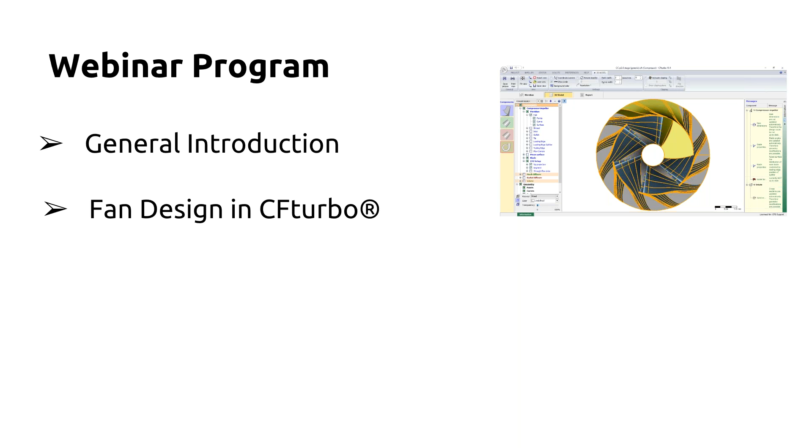There will be a live example where Oliver is going to introduce CFturbo a little bit, and then show a live example of a centrifugal fan, how it's going to be designed in CFturbo, with final export of the designed model to turbo machinery CFD. In the next part, the simulation part, Radek is going to show the turbo machinery CFD simulation and evaluation of that centrifugal fan, which was exported by Oliver from CFturbo in the previous section.

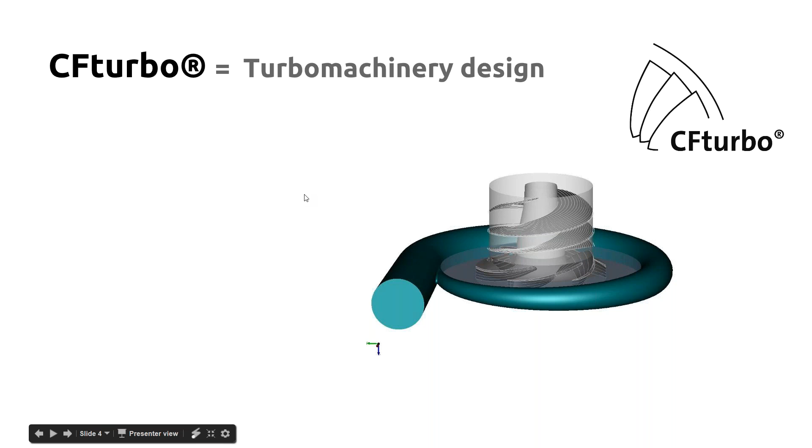CFturbo is a company based in Germany. We have two locations in Germany, one is Dresden and the other one is Munich. Our main product is the design software CFturbo. It's a modern and powerful user-friendly software tool for the conceptual design of turbo machines and its components, and it's based on latest design theory.

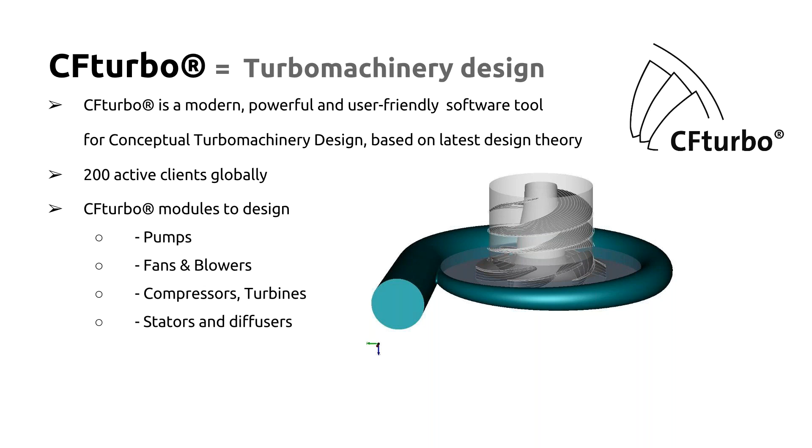Right now we have 200 active clients globally, and we see an ongoing growing process. CFturbo has different modules implemented to design pumps, ventilators which are fans and blowers, compressors, turbines, plus stators and diffusers, and of course volutes if there is a radial or centrifugal turbo machine to be designed. The industries we serve are aerospace, automotive, consumer products, energy, oil and gas, marine, mechanical and process engineering, plus the semiconductor industry.

Okay, so I think we can make you an organizer, and you can share your screen now and show the real life example in CFturbo. Yes, okay, thank you Lubos. Today I'm going to design quite a big centrifugal fan.

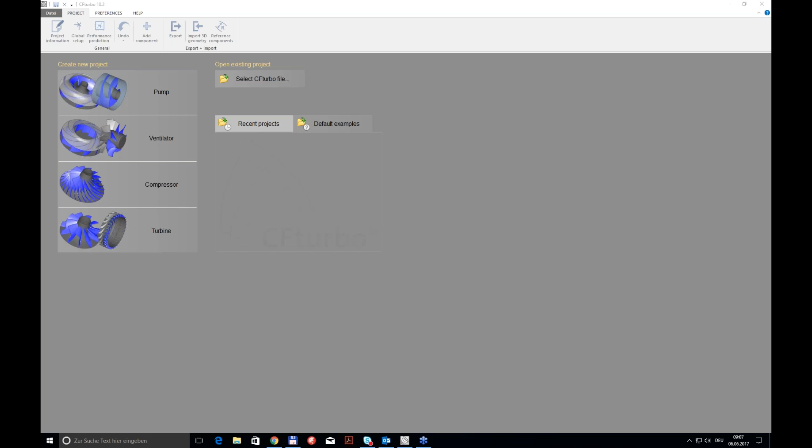As always, in case one wants to design something from scratch, it is necessary to first choose the machine to be designed, and secondly, set up or define the operating point the machine should run at most of the time, because what we are doing is a best efficiency point design.

I want to design a machine that has got a flow rate of 38,000 cubic meters per hour at a pressure difference of 0.264 bar, and it should run at roughly 3,000 RPMs. The fluid to be conveyed should be air, but this time it should be air with a higher temperature, which has a certain impact on the density.

Here, inlet conditions consisting of total pressure can be defined. It's not necessary for the design itself, but it's necessary for the setup of the following simulation in any simulation package.

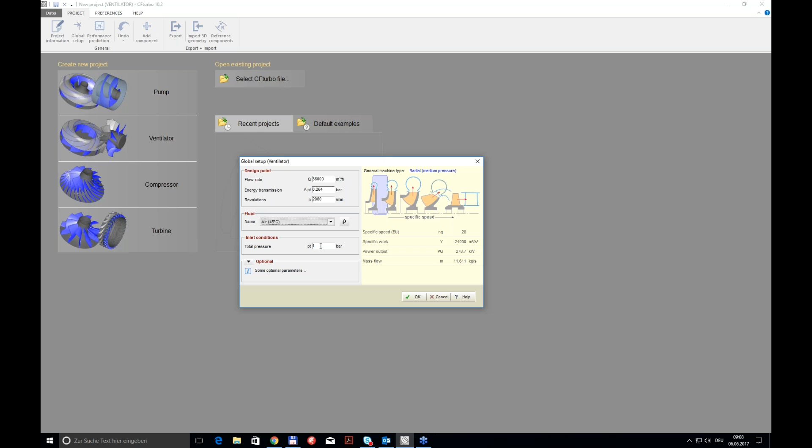Once that is done, CFturbo asks me which kind of component I want to design first, and because the impeller is the central or most important component of the stage, I'm going to start with the impeller.

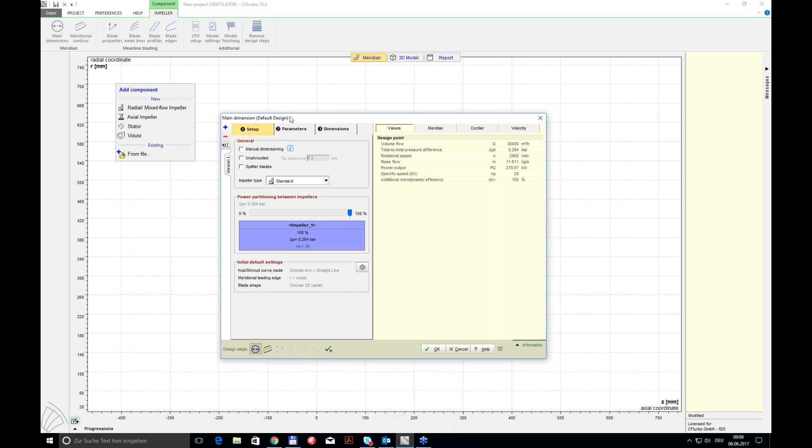The design process for the impeller always consists of a set of different design steps. The first one is the definition of the main dimensions, which just consist of inlet diameter at hub and shroud, impeller diameter, and the outlet width.

Because we call the software a conceptual design tool, the user is always guided through the design process and has got the chance to either use CFturbo proposals or do his own dimensioning.

CFturbo proposals are based on fundamental balance equations like Euler equations or continuity equations, plus empirical data that are implemented, and that can be seen and changed also by the customer.

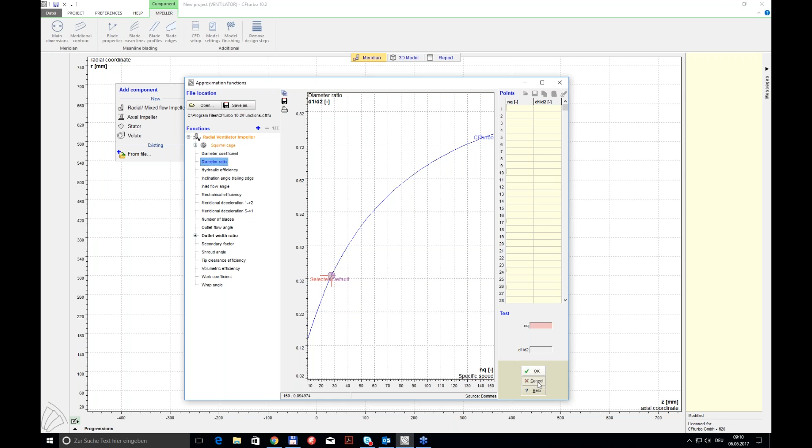So here, for instance, we have a diameter ratio given with respect to the specific speed, and the source is given. In accordance with the design point, you always get a proposal from CFturbo—for instance, the diameter ratio, which would be something like 0.325 or so. That's given for all empirical data, and the data can be overwritten by the customer and stored on his local machine so that the knowledge stays in-house.

Very important is to have an idea about the efficiencies one can get with this kind of machine. Again, they are based on empirical data and can be taken from what we call the approximation functions.

Once those data are set, either by default or by user input, one can have CFturbo calculate on that basis, plus the balance equations, these four main dimensions. I'm going to do that by just clicking on calculate, and I get these proposals.

What I want to show here is what would happen if I change a parameter. To this end, I check this automatic checkbox, which means that after any parameter change, the main dimensions will be calculated anew. So for instance, if I change the diameter coefficient, the impeller diameter must go through a change.

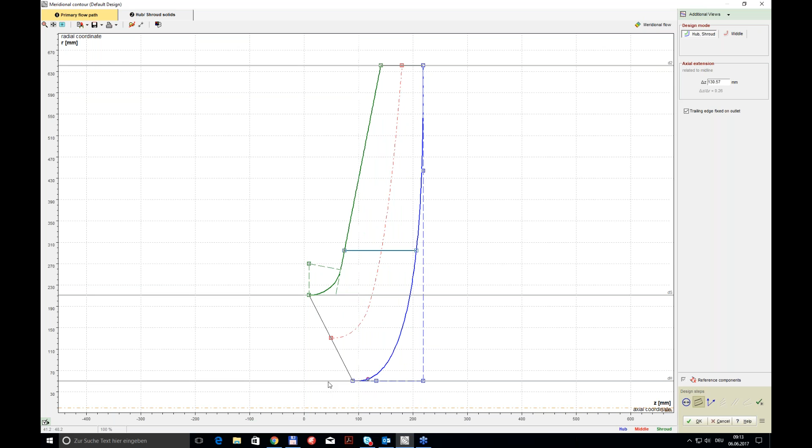The next design step is the meridional contour design, done in that second meridional contour design step. Because that's a simple centrifugal fan, the hub and shroud contours consist of lines, and at the shroud, one arc. At any time one can right-click on it and change the shape to, for instance, Bezier, which gives a lot more freedom to design the contour here.

Also, by grabbing the control points, I can change the actual extent—so maybe make that a bit bigger, or grab that arc control point here, and so on.

What I can also do is right-click on any of the control points, go into the context menu, and change the values there manually. By doing so, I get exactly the inlet conditions I want to have.

Also, what I can do is change the locations as well as the shape of the leading edge. For instance, here I want to have it still straight, but I don't want it radial, and that's why I'm changing the position of it like that.

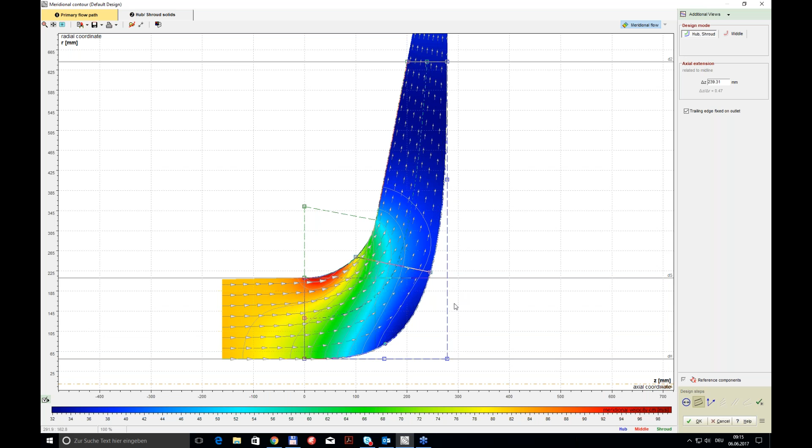Now I'm happy with that, but I want to show you the analyzing feature which is implemented. It's a potential flow solution for the meridional velocities in that meridional contour. From that you can see, for instance, that where you have small radii, you get higher acceleration, and at a hub it would be smaller, and so on.

Okay, once I have pressed OK, I can see that something has happened in the 3D model, because now we have a real 3D shape. But of course, nothing has happened so far for the design of the blades yet. To this end, I'm going to open the third design step, which we call the blade property design step.

Here, one has to define the number of blades, the general shape of the blades, because that's the centrifugal fan, and they are very often quite easily manufactured. I'm going for the circular 2D shape.

Also, one has to have an idea about the thickness of the blades, which I'm going to change to 6 millimeters here.

Because there's always a certain difference between the direction given by the blades and the actual relative flow, there is either a deviation angle to be defined, or the user should make use of the built-in deviation or slip models that are given here.

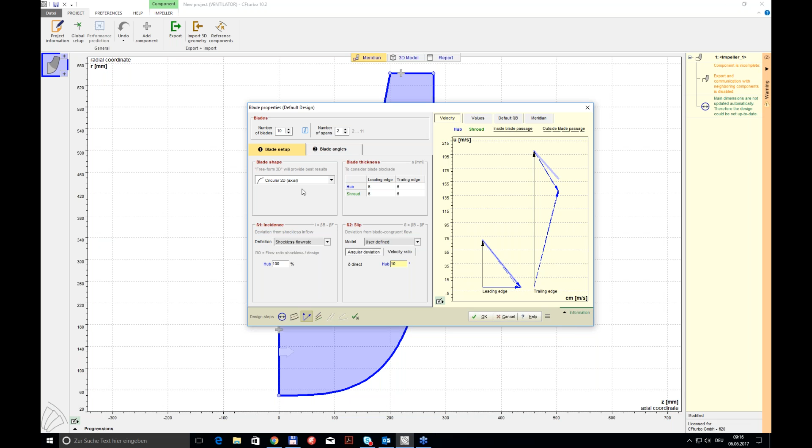Okay, I'm still sticking to 10 degrees on the hub. This time it's just defined at the hub, because with the circular shape one can only have one kind of master span, and all the others will follow the geometry of that master span in accordance to that blade shape.

The second tab holds the blade angles at leading and trailing edge. Again, they are calculated on the basis of the Euler equation plus the deviation angle plus an incidence which might be there and might be defined by the user in that incidence group.

Okay, once that is ready, there won't be any change in the 3D model, because the only thing that has been defined now are the inlet and outlet angles. The shape itself will be defined in the next design step, which we call the meanline design step.

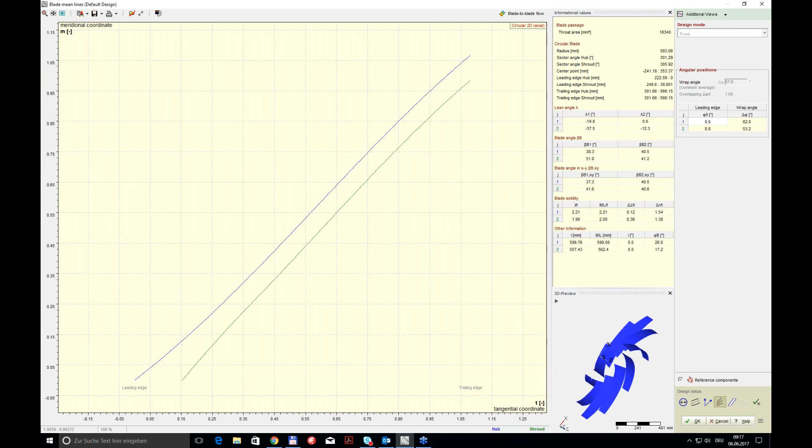As you can see here, there is just an information panel where no interaction is possible. The reason is that circular shaped blades are totally defined with the inlet and outlet angles plus the inlet and outlet diameters, and that's why nothing can be done here. But one can at least see the 3D preview and can make use again of built-in potential flow solutions to check the geometry defined so far.

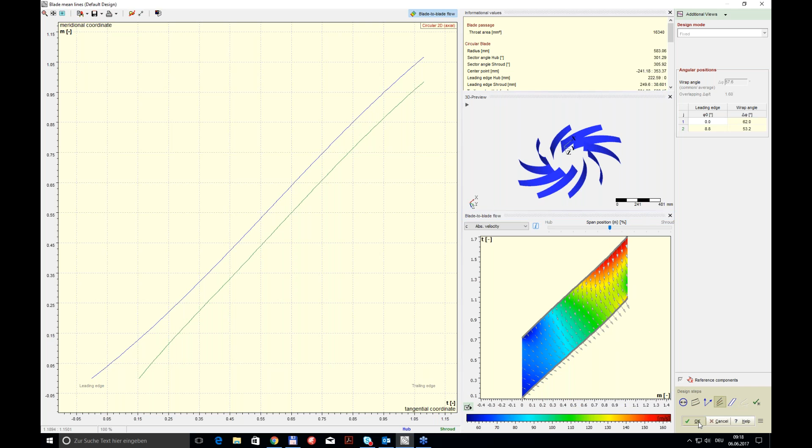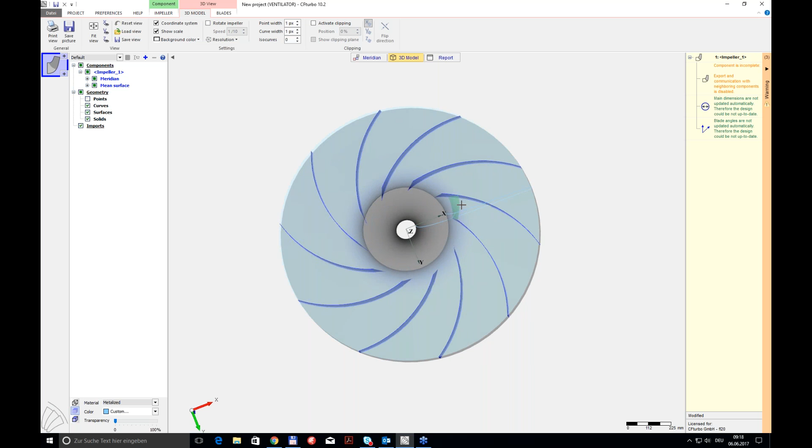Again, if I press OK and go back to the 3D model, what I can see is an impeller with blades that have a thickness of 0. Also one can see where the location of the smallest cross-section or blade-to-blade section between two adjacent blades is.

Of course, it's not ready yet, so the next design step is to put some thickness on that mean surface that has been just defined, and to this end the blade profile dialog can be used.

Here one can use the initial thickness of 6 millimeters and define a certain distribution of the thickness along the blade at hub and shroud. One can have it linearly distributed, or one can use Bézier curves again to distribute the thickness.

One even can, by right-clicking on it, load thickness distributions from a built-in profile manager, or one can also load polylines holding thickness with respect to the dimensionless length of the scale of the blades.

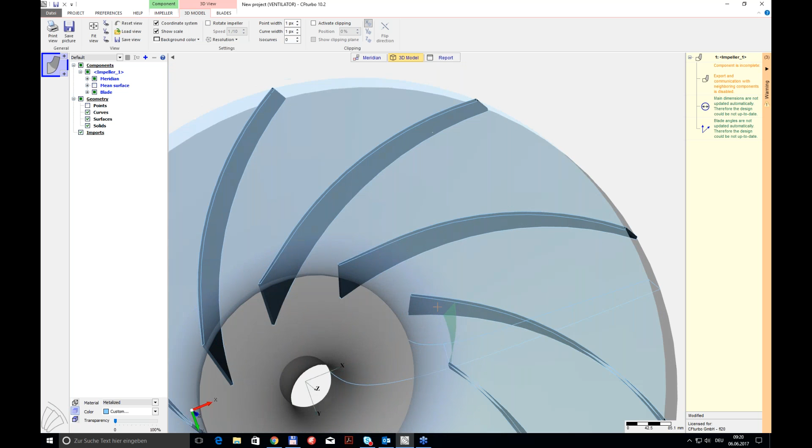Okay, but I want to stick to the simple approach with just 2 control points and a linear distribution. Once I press OK here, I can see that now there is a certain thickness applied on the mean surface, and the very last thing to finish this design of the impeller is to shape the leading and trailing edge.

Because you can see here at the trailing edge that the blade is not within the meridional contour, and also the leading edge is very sharp, the last design step gives the opportunity to shape that leading edge, for instance, with the help of an ellipse.

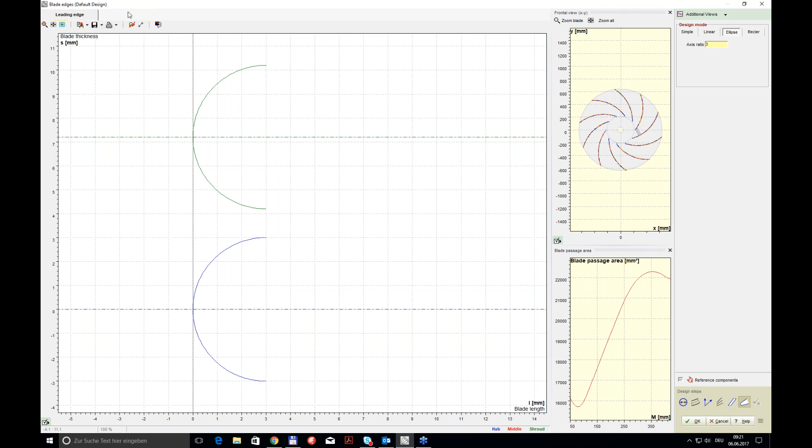Here you can give the half axis ratio of the radii, and the default is 3. If I type in 1, you see that this will be circular, but 3 will lead to a good elliptic shape.

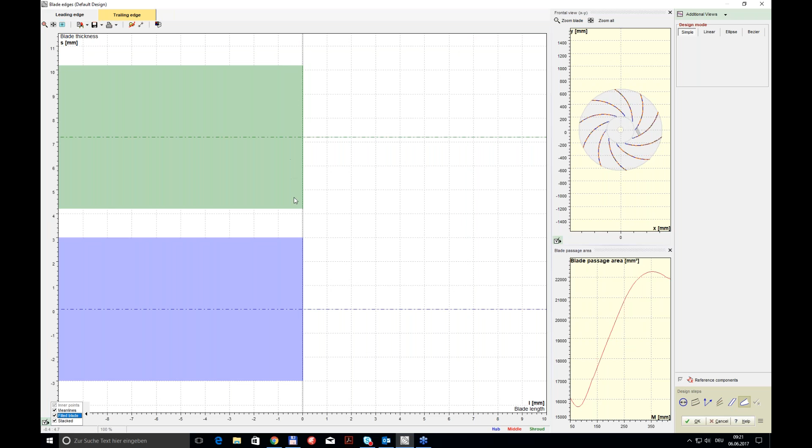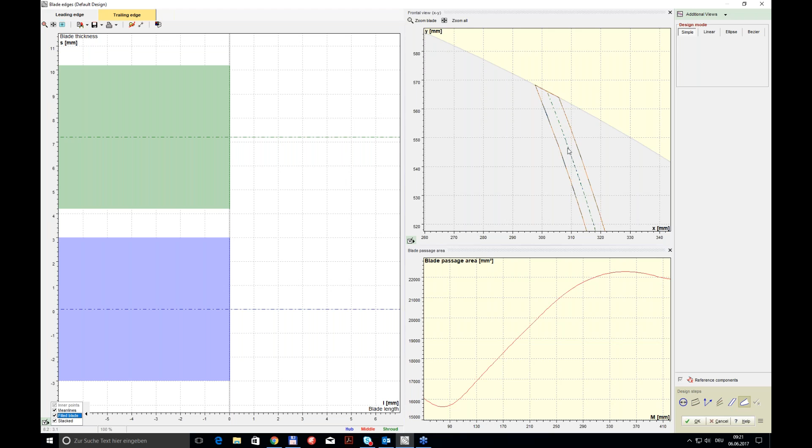On the other hand, at the trailing edge, one wants to have it trimmed with the outlet, and that's why this simple mode is applied here. You can see in that frontal view that now the trailing edge is not looking out of the meridional contour anymore.

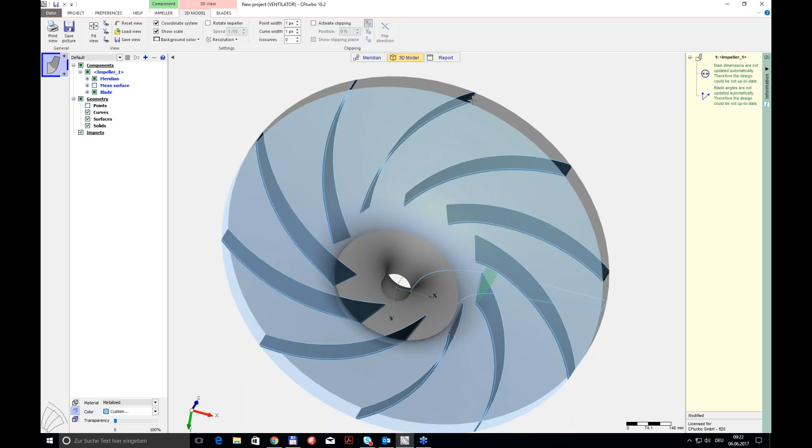Okay, now if I go to the 3D model, it's done. The only thing I want to do before I go further is add a small outlet extension, which will give some of the simulation package more freedom in the simulation process. To this end, there is an additional design step called CFD setup, where one can add this little gap at the trailing edge, and it can have a certain length, so for instance 6 mm in this case.

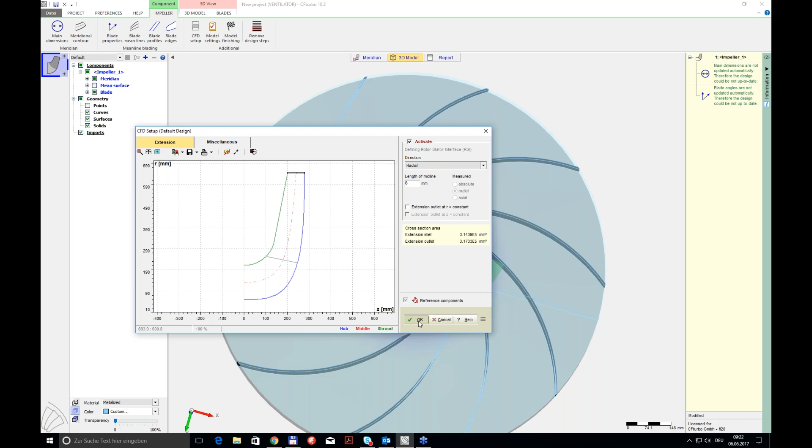And if I add this, I'm done with the impeller, and I want to save that and give it, of course, the name test, which is already there, but I'm going to overwrite it.

The next step is to add a volute at the outlet of the impeller. One can do that by clicking on the interface and telling it that there should be a volute defined there.

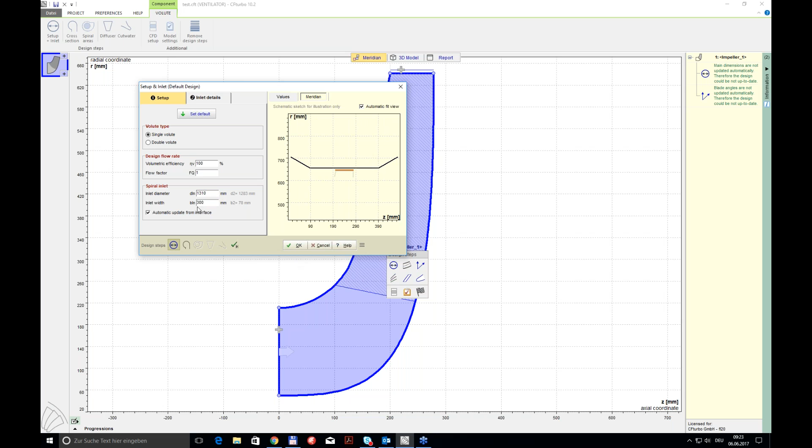Again, one starts with the inlet setup consisting of inlet diameter and inlet width. Defaults are given by CFturbo, and they can be overwritten according to the customer's wishes. So I want, for instance, to have it a bit wider than proposed by CFturbo, and maybe not at this location. That's why I'm going to increase that inlet width here quite a lot.

Next step is to define the general cross-section shape. It is done here, and because it's such a simple centrifugal fan, I will stick to the default setting of CFturbo, which is the rectangular shape. But as you can see, if I click on that combo box, there are a lot of different shapes, and there are also Bezier-like shapes or line segment shapes where you can roughly define any geometric shape you want to have.

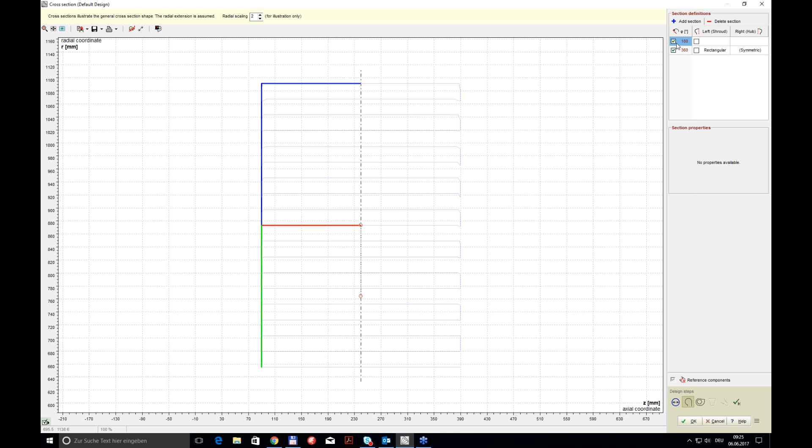Also, there is the possibility to add sections, which means with respect to the wrap angle, one can change the shape and have very elaborated shapes of the spiral. But again, it should be simple, that's why I'm choosing rectangular.

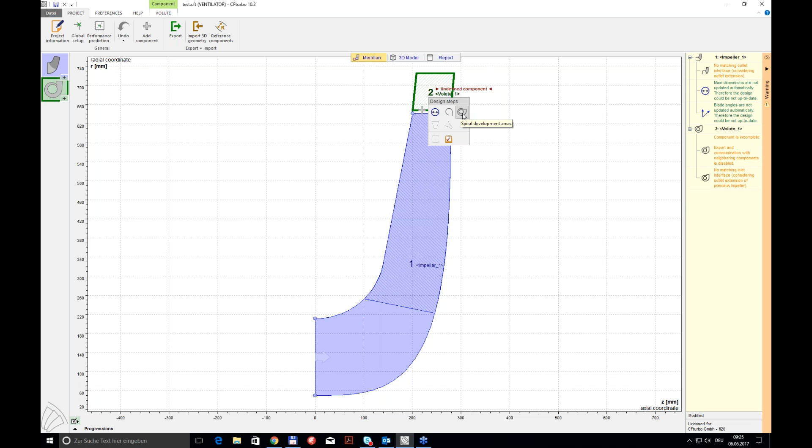Press OK. Of course, in the 3D model, nothing has changed yet because the design of the spiral will be done in the third design step. Here, the shape is scaled at any wrap angle location in accordance either to some design rules or, in what we call geometry-based, in accordance to a certain either outer radius distribution or area distribution.

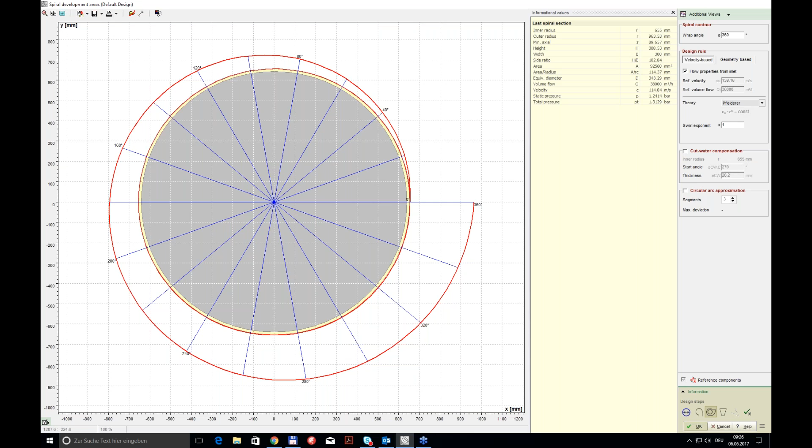So for the initial design, it's probably wise to choose a design rule, and one of them is Pfleiderer's rule. He made that swirl approach where one can choose between different swirl exponents. And if I leave everything to default, I get something like that, where my last radius is something like 655 millimeters. If I press OK and go to the 3D model, then I see now the volute.

Still missing is an outlet diffuser plus a proper cutwater. The outlet diffuser is defined in the next design step, where one can tell it how long that diffuser should be and what should be the end cross section.

The end cross section can be circular again with a certain diameter, or rectangular, which is the one that I want to go for. Because the inlet width into the spiral was 300 millimeter, I'm going to type in the width of 300 millimeter for the diffuser as well, because then one can just cut metal sheets and weld them together, and make up that ventilator stage in a very simple manufacturing process.

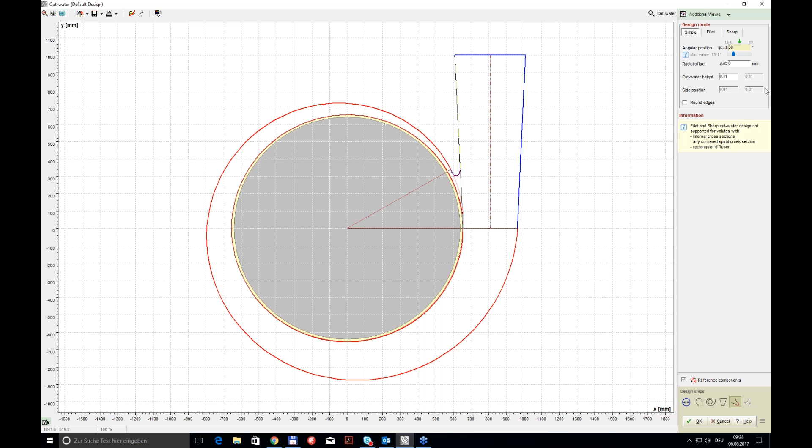Okay, and now what you see is the volute with a very sharp cutwater, and that's why the last step is to add a cutwater at a certain position here. So for instance, I can change that to 30 degrees, and again, if I press OK, you see now it's almost done.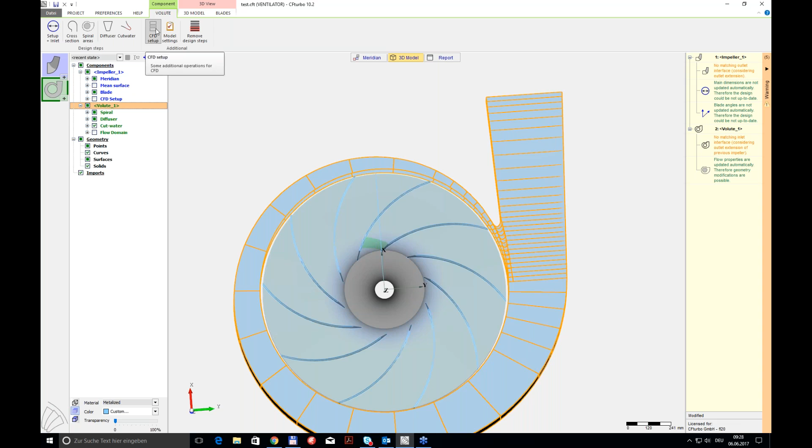I should save that again. Because we have a little gap between the impeller and the volute, for the simulation process, one has to close that gap, which is done in the Volute CFD setup. So checking the rotor-stator interface connection will yield that closing, but one can also extend the outlet diffuser by another virtual component in order to support the simulation process that might follow the design.

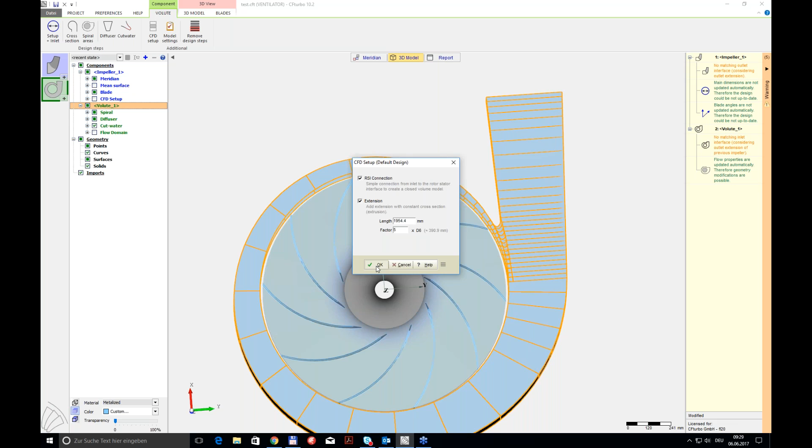Okay, so the very last step is then at the end go back to the impeller and make there what we call a model finishing with solid trimming. Here we use the built-in CAD kernel in order to extend all surfaces and get very nice intersection of it, and by doing so producing very nice watertight solids that can be used in the 3D export steps.

As well as for simulations and so on. Okay, once I have done that, the last step before I give the ball to Radek is to show the export panel, because there are a lot of... oh, that was missing. There are a lot of... that doesn't matter.

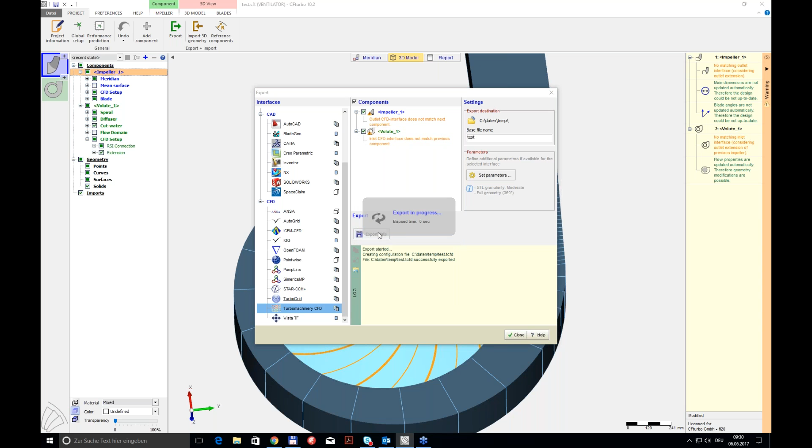Interfaces implemented. One is the turbo machinery CFD interface. Once that is chosen, I have to choose which component has to be incorporated in the design in the export process, and also what are the triangulation parameters for the STL triangulation.

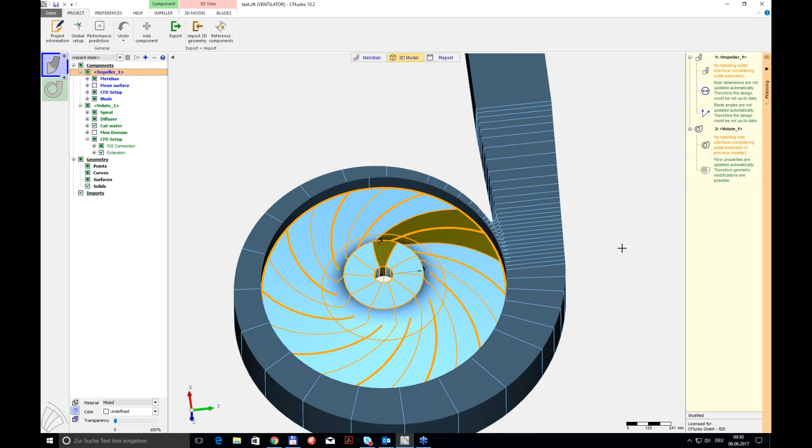And once that is done, I can start the export process. All the necessary data are written, especially the TCFD file, which holds all the data necessary to set up the simulation process in TCFD. Okay, and saying that, I'm finished, and I would ask to take over and carry on.

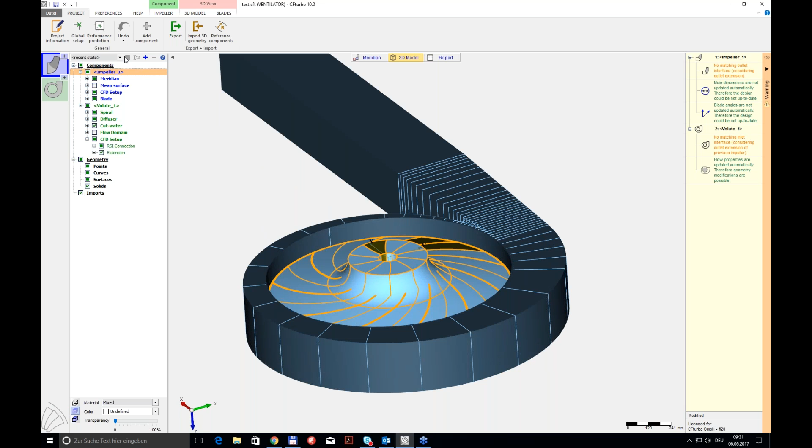Okay, thank you, Oliver, for the turbomachinery design part. It was very impressive as usual. It took, yeah, I'm always impressed because it took you like 20 minutes to design a centrifugal fan from scratch. And yeah, let's move in the presentation.

So I'm gonna take back the presentation, and yeah, it's time to switch to the turbomachinery CFD part of this webinar.

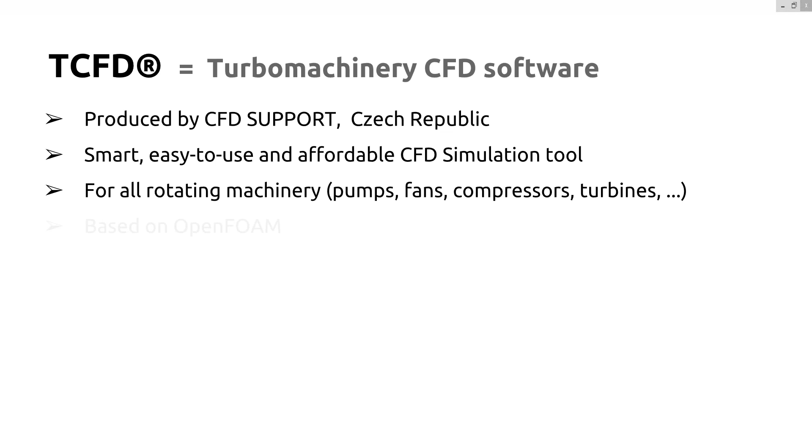I'm gonna continue with a brief description of what turbomachinery CFD is. Turbomachinery CFD is a unique software developed by Czech company CFD Support. It's smart and easy to use CFD software. Turbomachinery CFD was designed for CFD simulations of all rotating machinery, such as fans, pumps, compressors, turbines, turbochargers, hydro turbines - all of them, both radial and axial machines, both compressible and incompressible fluid flows.

Turbomachinery CFD is based on OpenFOAM, and we believe turbomachinery CFD is unique for at least four reasons. So I will quickly go over them. First, it has no licensing policy, which means our clients can keep turbomachinery CFD forever, and they can use it for unlimited number of users, jobs, or cores. We have a different business model than standard CFD codes.

With turbomachinery CFD, what is paid for is the first delivery and later technical support and software maintenance. This gives the investment in turbomachinery CFD a permanent value, and also this means our clients can scale their CFD simulations in a really big way.

Number two would be turbomachinery CFD is fully automated, which means all the workflow from the initial data to the final engineering results can be run by a single command or a single click in the graphical interface. And all the process is being done automatically. For this reason, turbomachinery CFD is also extremely effective.

Number three would be we deliver extensive technical support with turbomachinery CFD. We keep a custom approach to every customer, to every issue. We never leave behind any of our clients. We are very flexible in it. Turbomachinery CFD technical support is unlimited. We support our clients even in matters out of the turbomachinery field, for example numerical mathematics, physics, CFD, IT, or even software engineering.

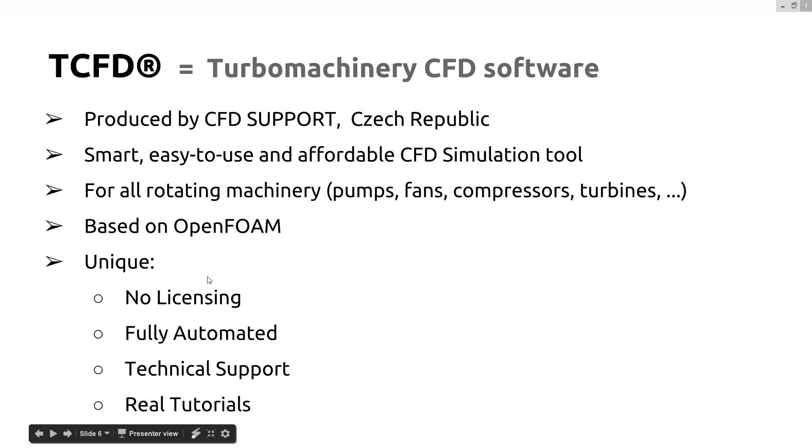There are many other benefits of using turbomachinery CFD. I'm not going to go over all of them. I'll finish here with my last point: at CFD Support, we believe the future of CFD is automation. In CFD, everything can be automated. The automation is extremely effective, even more effective than we expected in the first place. So nowadays at CFD Support, we think only in an automated sense, and this brings a huge value to our users.

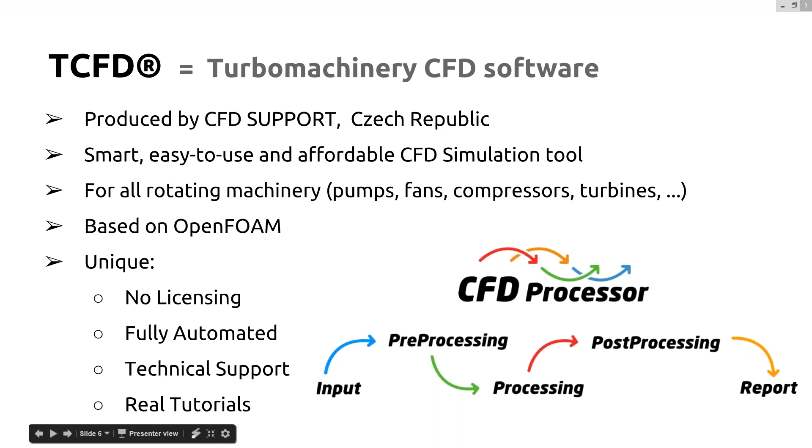I think it's time to switch to Radek's part, which is a live example of turbomachinery CFD simulation of that fan, exactly that fan that Oliver designed in CFturbo. So Radek, are you ready for your part?

Yes, I am. Please, can you give me the presentation? Okay, I think it's okay. Let me show my screen now. You can go ahead, I believe you can see my screen. Yes, we can. Okay, perfect. So good afternoon.

I will start directly because Lubos has already said all important information, so I will jump directly into the practice. I have about 15 minutes to show you how easy it is to use turbomachinery CFD. I prefer to introduce you to the basic principles rather than show you the very details in CFD setup. So I will really show you the basics, and we are going to use the export from CFturbo.

This makes the workflow even simpler. As you will see in a few moments, with CFturbo and TCFD, we are now able to run a CFD simulation and get significant results with just a few mouse clicks.

So let's start. We simply start from the data which Oliver has just generated. At the beginning, you need just the STL files, which define your geometry, and the configuration file, which is automatically generated from CFturbo. This basically defines all necessary parameters which allow us to run the simulation directly without any modification. It sets the fluid properties, simulation properties, defines the geometry, and so on.

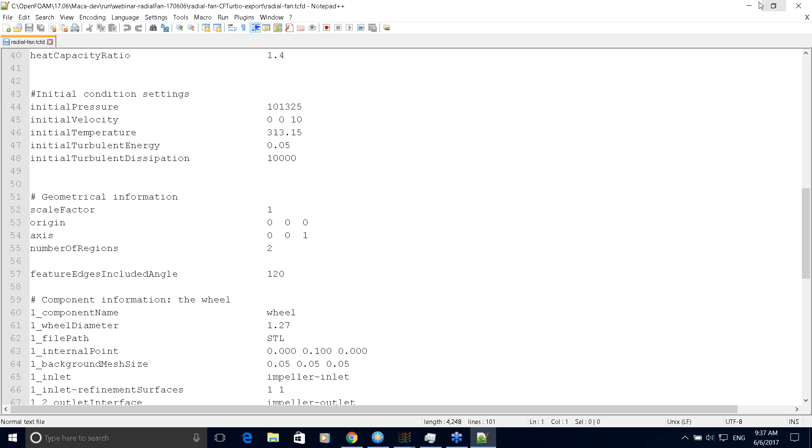To start working, we need just to click on the configuration file, or if we started from scratch, we can click on this icon on the desktop. So I will click on this radial fan configuration file, and the new ParaView session will appear directly.

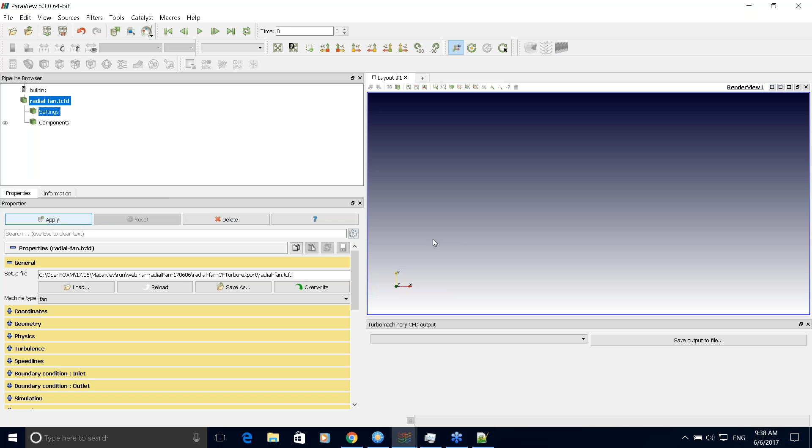I am using a brand new version of our turbomachinery CFD, which is going to be released next week. To start using it, I just click on the apply button, and in a few seconds the input geometry will appear.

This is the geometry which Oliver generated. This is a standard layout. Here you can see the geometry, and here you will see the log screen or log window, showing the actual processes which are running. Here is the pipeline browser, so we can add other filters to work with TCFD. An important part is these menus, which contain the setup of all necessary parameters.

So everything is preset. I will go through this very quickly. Here in general, you can load, save, or overwrite the configuration file. You should set the machine type which you would like to simulate. This defines the coordinate system of the rotation.

In this geometry, there are some parameters, for example, to scale the geometry, and the physics setup, so the setup of the fluid. Of course, you can also set the turbulence model.

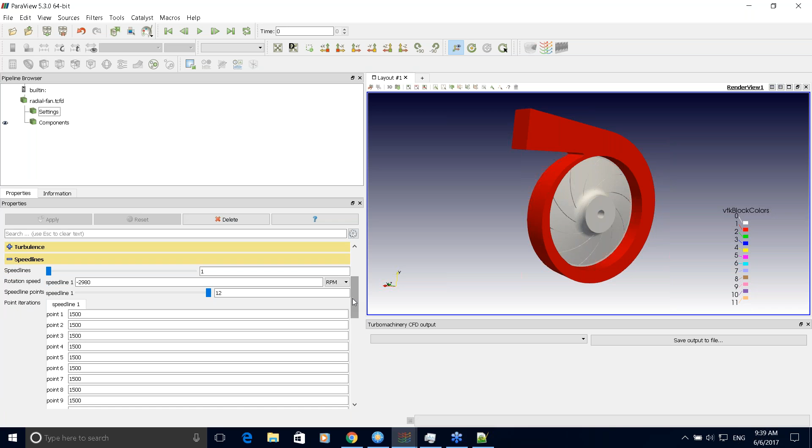Here in the speed lines menu, you can define more points, which I actually modified, because from CFturbo you get one point to simulate, which should correspond to the best efficiency point. But for validation or for generating efficiency maps, you can add more points to be simulated, or even add more speed lines with different rotation speeds.

The next menu is simulation, an important menu here. Basically the most important parameter is processors, so you can run the simulation using any number of processors, usually the number which your hardware provides. There is no limitation, no licensing policy, so you can use a very high number of processors.

Other advanced parameters let you set numerical parameters like relaxation and so on. Here are the initial conditions for the simulation. An important part is the components part.

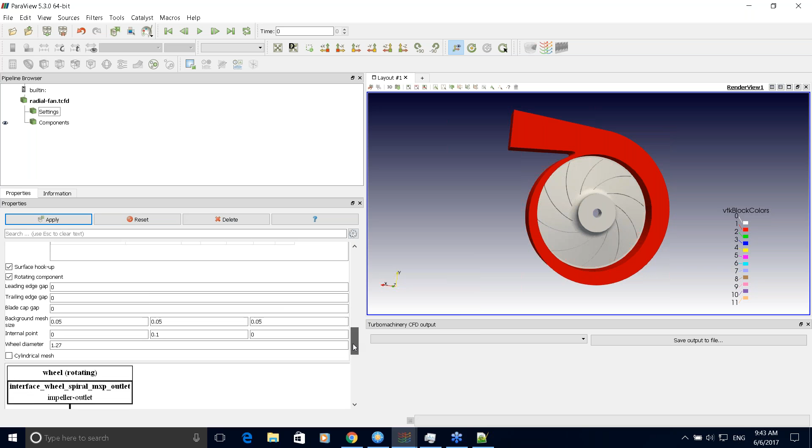Here are other parameters to set. If you define the geometry from STL, you should define the fineness of the mesh. Again, it is set to default, but you can modify it. For example, an important parameter is the background mesh size, which is the largest cell in the computational mesh, and there are more parameters to be set.

Here is the topology graph, which is really nice during the setup part. If you are setting your geometry from scratch, it is really nice because you see the actual topology, which part is connected to which, which part is rotating, and so on.

So there are other parameters for the meshing. The meshing tool is actually the snappy hex mesh.

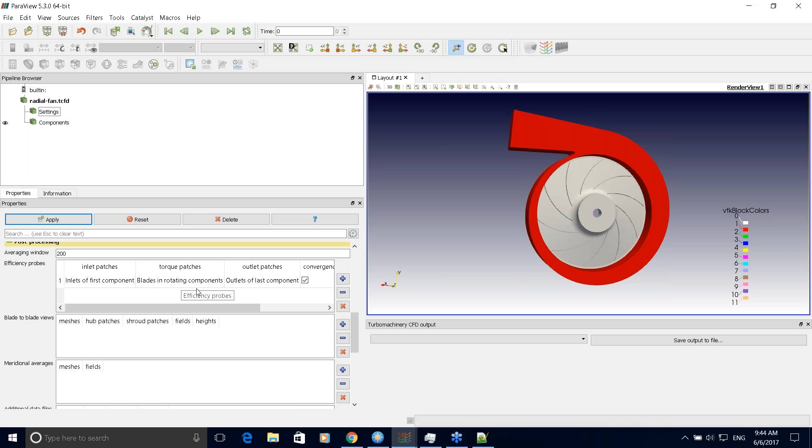The last two menus: first, post-processing. This is a new feature. Here you can define which parts will be used to evaluate efficiencies, pressure drops, and so on. The default is inlet to the geometry and outlet from the geometry.

Blade-to-blade views: you can define the blade-to-blade views, which will be automatically generated. Basically, you should define which component to evaluate. The default is the rotating component, and you can set which field you would like to visualize and at which radial height between the hub and shroud.

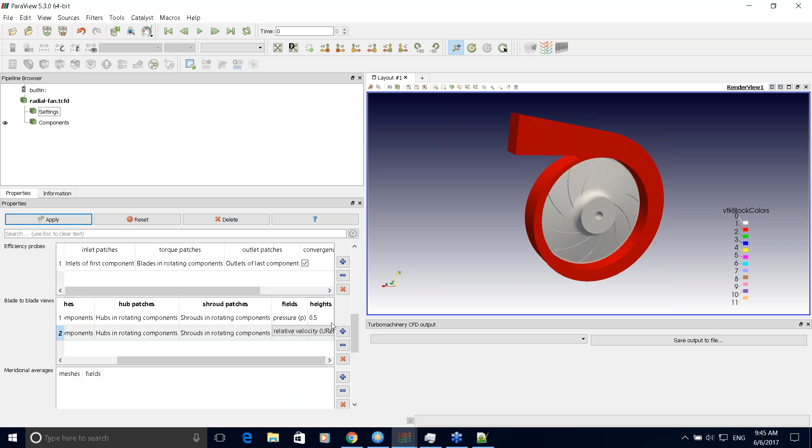I will, for example, add pressure, static pressure, or for example relative velocity with LIC, which is the streamline filter, and so on. Of course, you can add more heights and more fields to evaluate.

Meridional average: again, you can add the meridional average filter, and again you get automatically a nice visualization at the end of the computation. You can set, for example, total pressure to evaluate, and other fields.

A really nice feature is to add some old graph to compare with the new results. So you can add some old data. I have here some old graph, and I can add it because I know that these columns define efficiency and mass flow rates, flow rate versus efficiency. So I would like to add old data to this graph.

The last one is the scripting, so you can add your own user-defined functions to set something which is not available implicitly in these menus. Whenever you are satisfied with the setup, you should approve it by clicking on this apply button.

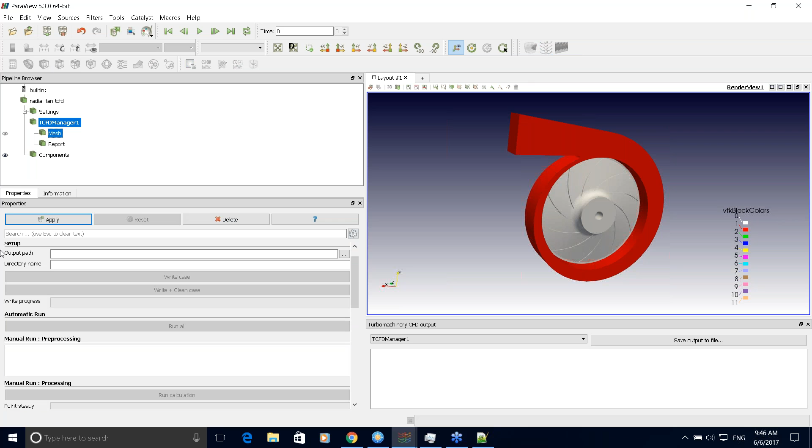Now the setup process is done, and afterwards we will apply this TCFD manager, using which we can manage all steps of the simulation. At the beginning, we can define the name of the directory in which everything will be stored. Again, I need to click on apply button to approve my changes.

Then the first step is to write the case. Now the TCFD processor is writing all necessary files, directories, and other stuff to run the simulation properly. Here in the log file, you can see what is happening right now.

For the first step, you have two options: you can run all by one click, or you can do everything step by step, first meshing the geometry, then running the calculation, and then generating the report. So first I will click, for example, on mesh all.

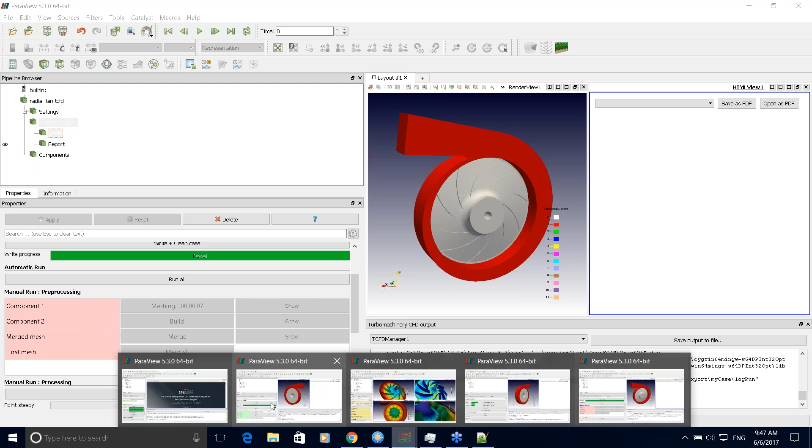Now the meshing process is running, creating the mesh. If I jump a little bit, we are now at the step where the mesh is generated successfully. You can visualize it by clicking this show button, and here we can make the mesh visible by clicking on this eye icon, and invisible for other components. Now we can check the mesh, for example.

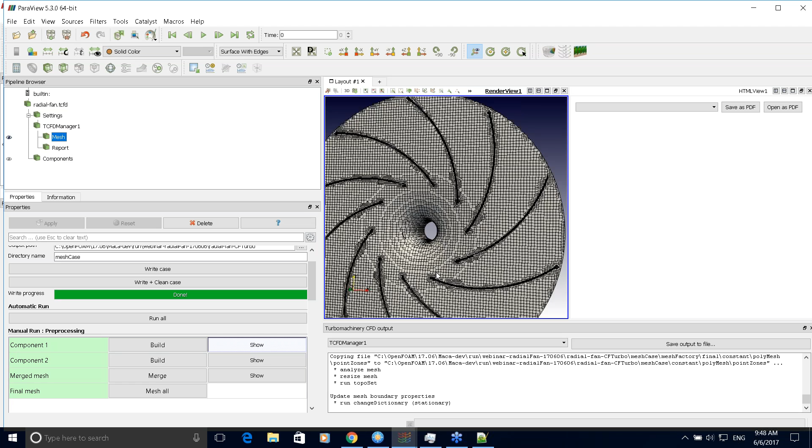When we are satisfied, we can run the calculation just by clicking on this button, run calculation. You can see the process of the calculation.

I will jump here because I've run the simulation before the webinar started. So now we can see that point 2 is simulated. You have information about the time left for the whole computation, because I set 12 points to be simulated. Anytime you can, for example, skip to the next point.

And what is important, anytime you can generate the report. There are two buttons, which is also a new feature. You can generate the light report, which will show you the actual data of the simulation, and is generated very quickly. So when I'm clicking on it...

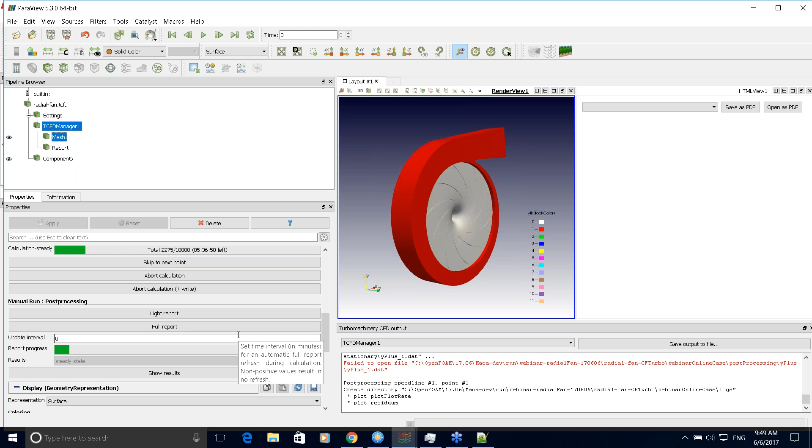Now the light report is generated, and when it is generated, it will appear automatically in this right window. And when the mesh or the computation is finished, then we can click on full report to see the full report.

So for example, here we have the light report, which shows basic information and important convergence of flow rate, residuals, and for example fan characteristic and efficiency. Because we have only 1 point, but we can see that the first point has 83% efficiency.

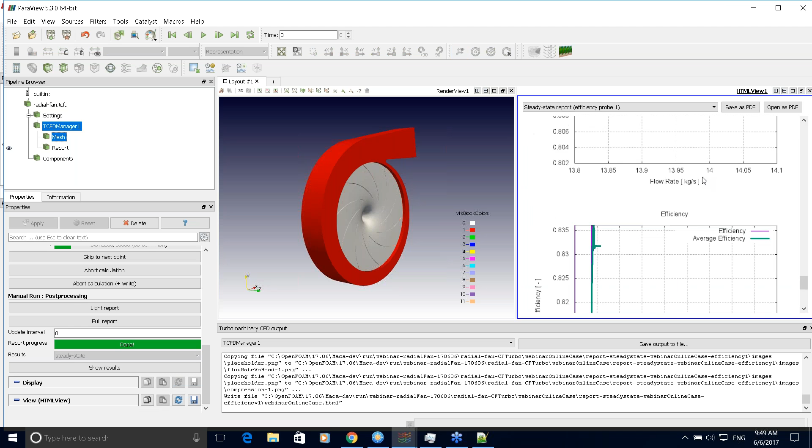At the end of the computation, which I have here, we can see all is done, and I can generate the full report, which takes more time. Now I would like to briefly go through this report.

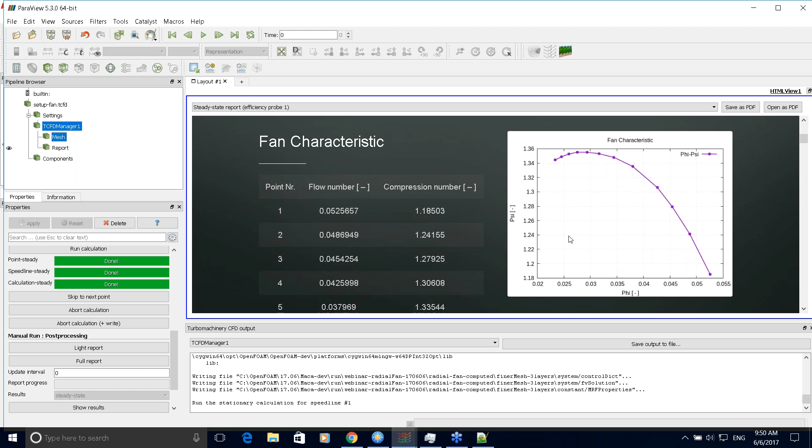You can see basic information about the simulation, for example Y+, about the mesh, wall clock time, so the overall time of the simulation, and fan characteristic, which is the graph showing the numbers psi versus phi.

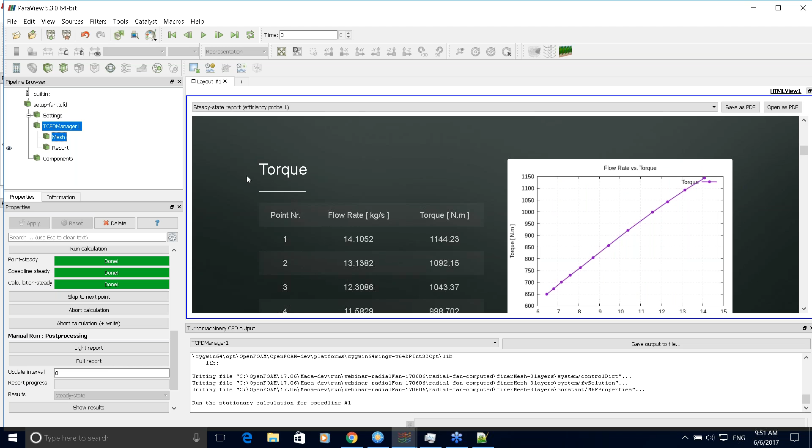And the report contains other variables, for example torque, total pressure difference. Always you can see the graphs and the numbers in a table for each point, and so on.

There are a lot of variables, for example total temperature. The next one is velocity magnitude per interfaces, and so on. And what I would like to show you is the blade-to-blade view, which I have defined.

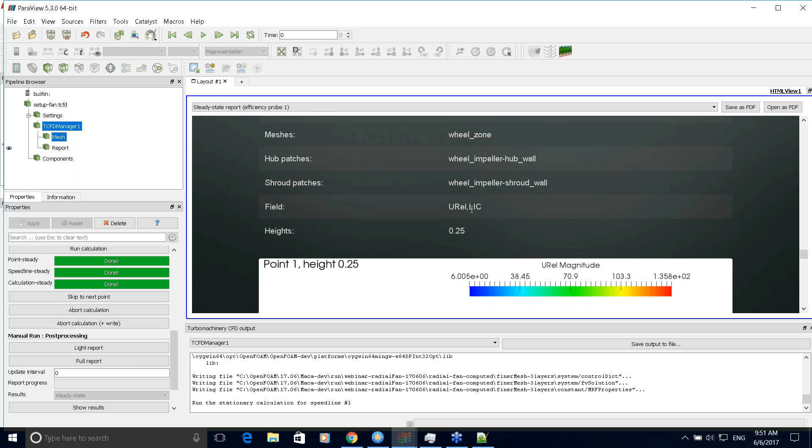And here we have plotted relative velocity with LIC filter, which is the streamline filter. Again, you can nicely see, for example, I guess 0.4 has the best efficiency, and you can see that the points with lower efficiency have more recirculation between the blades.

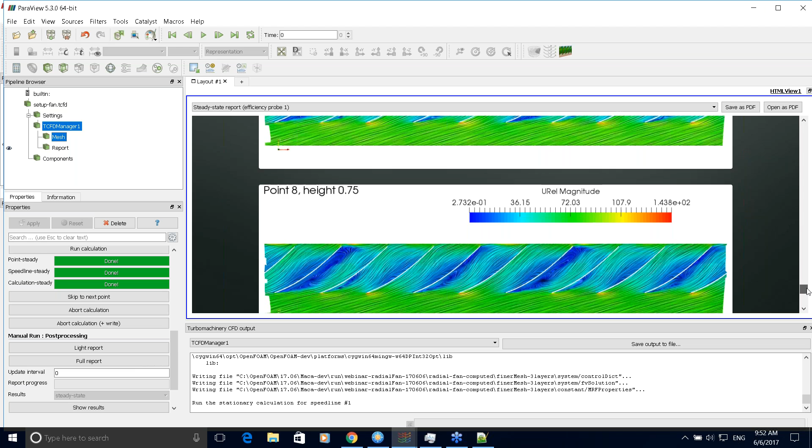So you can nicely analyze the results. And the last one was meridional average, so you can see the meridional average. For example, here we can see the total pressure.

So this was the automatic evaluation, but you can also do your own visualization. For example, I prepared here. You can visualize just any part of the geometry with, for example, this total pressure distribution.

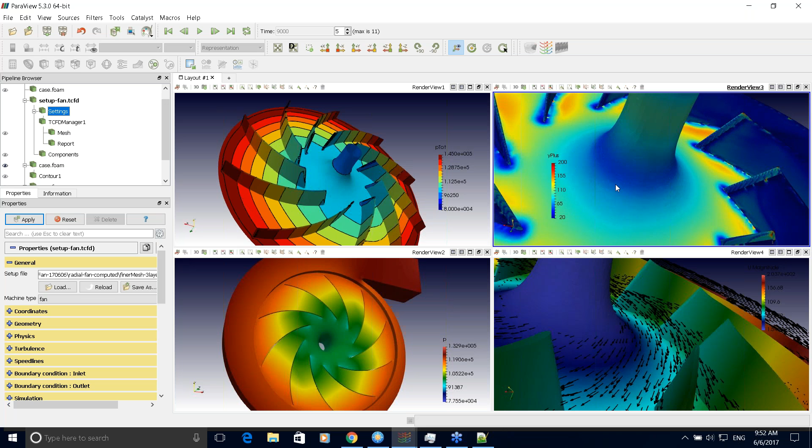You can visualize the whole geometry, for example, with static pressure distribution. You can visualize Y+ if you are really interested in the turbulence model, so you can nicely see in which part you have Y+ in the correct range, and a lot of other filters you can apply on your geometry.

Okay, I think my time is almost up, so I will just summarize. As you have seen, TCFD is a great, easy to use and powerful tool for detailed evaluation and validation of your geometries. So basically in CFturbo you can design your machine, and then by a few clicks, even without deep knowledge of CFD, you are able to validate your geometry.

And on the other hand, TCFD can be scripted and therefore easily incorporated into your current CFD workflow, for example. So using CFD for turbomachinery evaluation has never been easier.

So my time is up, I have to hand back the presentation to Luboš. No, it's okay, just take your time. Yeah, no, really, I'm finished. Thank you, okay. Okay, nice, thanks, thank you Radek. You're welcome. So is it back on me? I guess it is, okay. So yeah, thank you Radek for your live demo.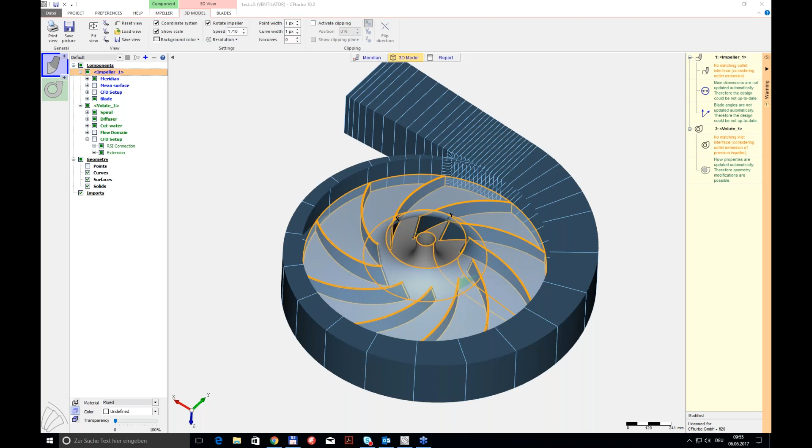Yeah, we can see CFturbo now, so I will read another question. Question to Oliver: how to address air with dust particles at elevated temperature, like flue gas delivery? In the design process—

Oliver, we can't hear you now. At least I can't hear you. Okay, so it seems we have lost the connection with Oliver.

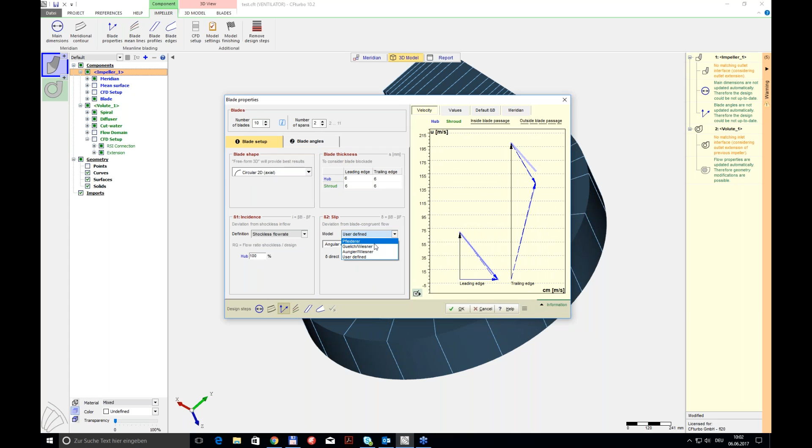No, you don't need to calculate it on your own. There are these modules implemented, and once they've been chosen, they will be considered in the design process. Everything, especially the calculation of the slip or deviation angle, is then done by CFturbo.

So if I switch to the Gülich-Wiesner model and click calculate, the deviation angle is calculated as 28 degrees according to the impeller diameter, design point, and of course the slip model given here. So everything is always proposed by CFturbo, but one can override it and adjust things according to their own needs.

Okay, thanks. The next question on CFturbo is: would you expect this impeller design to meet the required duty point on the first attempt?

If it was like that we wouldn't need CFD. It depends very much on the design point and the machine you want to design. Sometimes it's quite close - we have customers that don't use simulation techniques at all, but most customers need a couple of loops or iterations before they reach the design they want. But because everything is parameterized and the interfaces are there, it can be done quite quickly in a decent time scale.

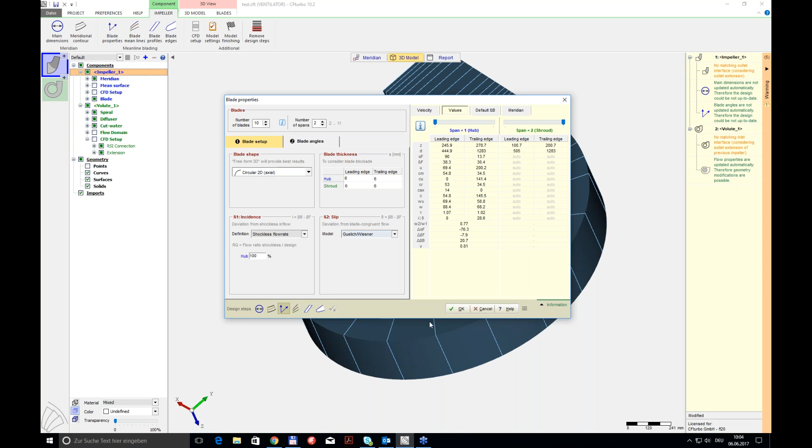Yes, it is. If I go back to our export panel, one can see there are a lot of interfaces implemented. We have general geometry formats, which are text or XML data. Then neutral 3D geometric formats - STEP, IGES, STL, BREP. We could even export, well, not very high quality, a tetrahedral volume mesh if we want. Then we have interfaces to CAD packages, and a big deal of CFD packages that might be used on the customer side.

And everything can be scripted and used in a batch run, which means one could also incorporate CFturbo in an automatic optimization workflow. Optimization is very popular, a huge trend in CAE in recent years. So yeah, very useful. Okay, the next question.

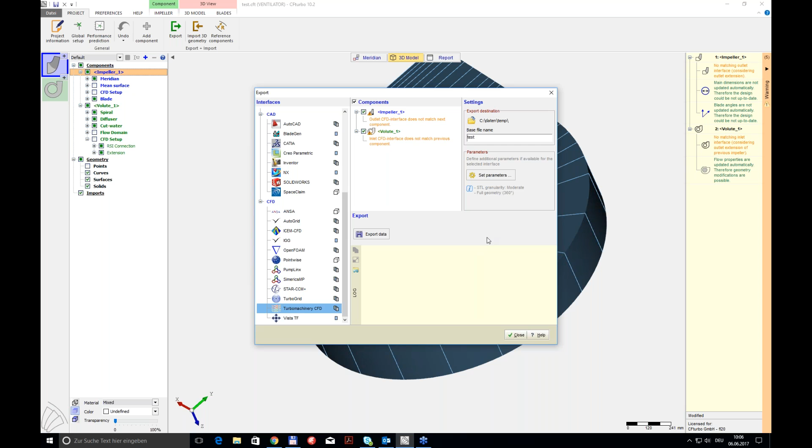Does CFturbo predict the required power? It does - we have implemented a performance prediction. Let me get rid of some additional curves. Underneath the values we have here is also what we call the required power, and that can be estimated here. But of course the accuracy of that implemented model is very poor compared to CFD simulations.

That's why we always have this warning here, because it just depends on a couple of geometric parameters and a couple of empirical coefficients. I would always recommend going into CFD and validating the power and performance of the machine there, rather than using that simple performance prediction.

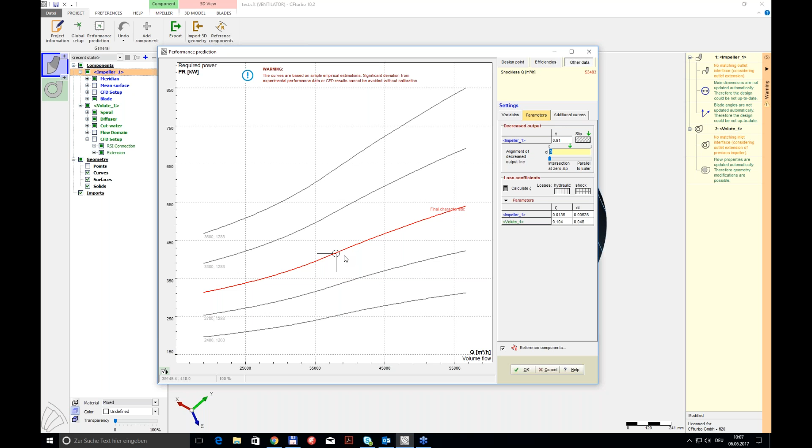Okay, thanks. The next question: how many types of volute does the software support? Not the sectional shape, but the classification - internal, external, or center type. The internal one is famous for its extreme compact size but prone to lose total pressure along the volute, from Bhargav. So, would you, Oliver?

Right, yes. All the available shapes are given here, and it's not only the shape that can be chosen but also whether it's external or internal. For instance, what we call the round internal one would be the one probably asked about, and that would yield a very compact design but with the disadvantages mentioned in the question. They're all given here and can be found here. Probably the most important thing is that with the round internal type, you get a very small outer diameter.

Okay, and perhaps the last question on CFturbo: I noticed you changed the meridional contour in CFturbo from the default. Is this to improve the efficiency of the impeller or to meet space requirements? Are you looking for a constant velocity across the contour?

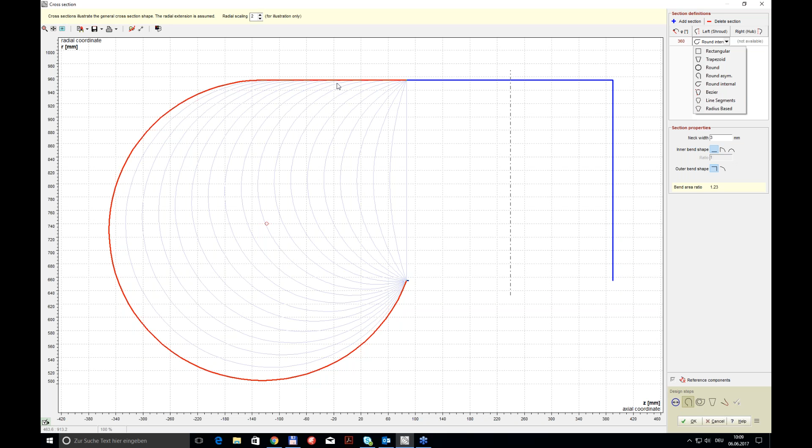Okay, yeah, I think this is it for now, and I will switch to Radek. So are you ready? There's a question: how about using LES or DES turbulence model in TCFD, from Jan?

Yes, it can be done, not implicitly, because at this version we provide just K-omega SST, K-epsilon, and laminar turbulence models, but we also provide transient simulations. The video you saw before the webinar started was generated using TCFD with the DES turbulence model. I created a simple script which can change the turbulence model and set it for DES modeling.

So it's not available implicitly, but it can be simply modified using the scripting menu. So basically it is available, and we can provide a script without doubt. It can be simulated in TCFD with either LES or DES - basically any turbulence model available in OpenFOAM.

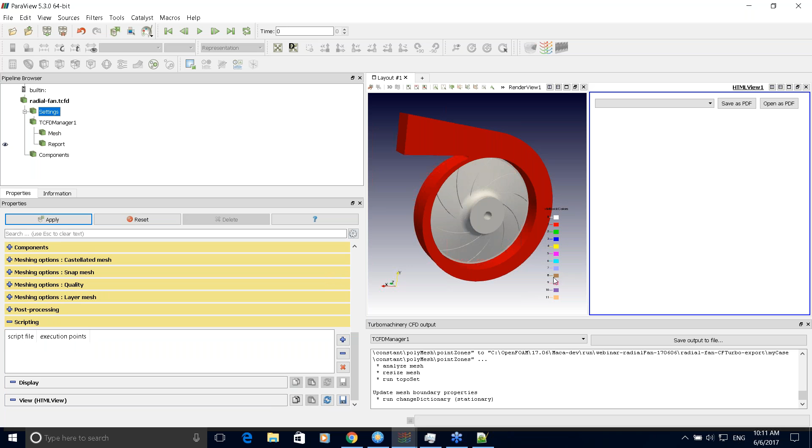Well, thank you Radek for this. And perhaps the last question from today's webinar is from Harry: how close is the performance prediction in CFturbo for this particular example to the CFD software?

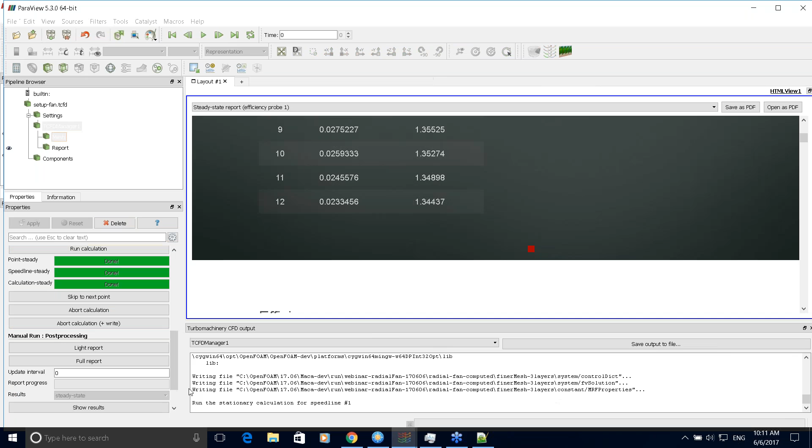Well, I have to say I'm not the right person for this. Perhaps Oliver, would you try to answer or comment on this?

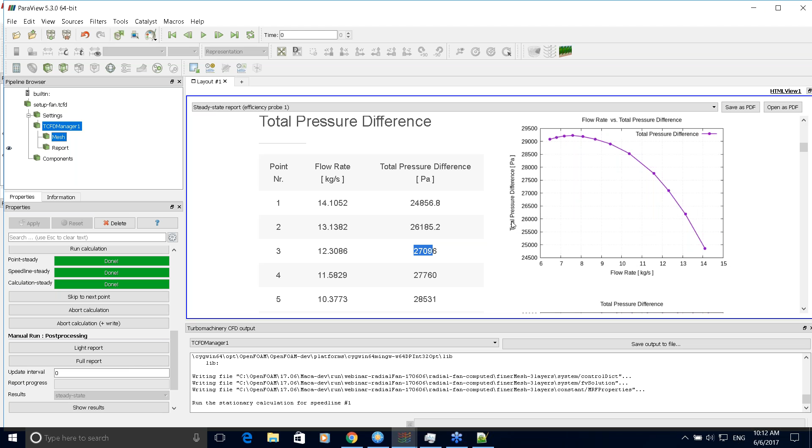It's somewhere here. Let me tell you the flow value in cubic meters per second. The best efficiency point in the simulation, which is this one, the fourth point, has 11.58 kilograms per second. But this is in kilograms per second, not cubic meters, so times 0.2 or something like that, maybe.

Okay, but the global setup flow in kilograms per second is something like 10.5 or so. Yes, it's quite fine, very good. And what is the pressure difference there?

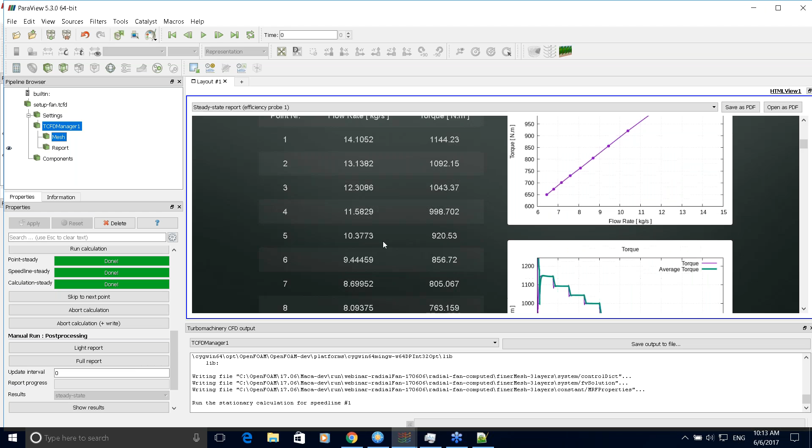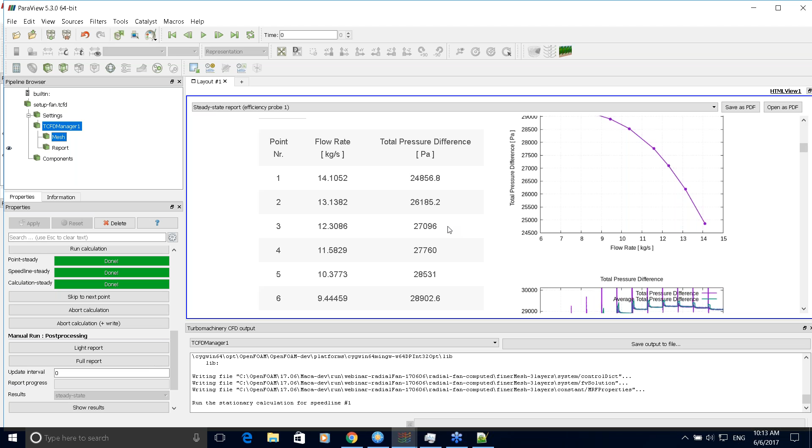And the pressure difference for this point - total pressure difference - is 27,000 circa. Okay, and our prediction gives 26,500 or so. At least let's say it's comparable. Yes, comparable. Okay.